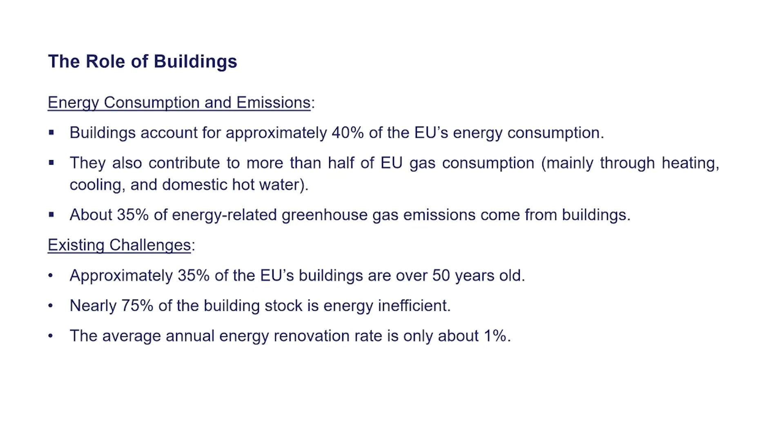First of all, as mentioned by Vitalija, buildings account for approximately 40% of the EU's energy consumption. They also contribute to more than half of the EU's gas consumption, and about 35% of energy-related greenhouse gas emissions come from buildings.

And there are actually a lot of existing challenges while trying to tackle these sustainability matters, as approximately 35% of the EU's buildings are over 50 years old, nearly 75% of the building stock is energy inefficient, and the average annual energy renovation rate is only about 1%.

The directive itself tries to tackle those existing challenges through two main ways: one is the renovation of currently existing buildings, and two is stricter requirements for new buildings.

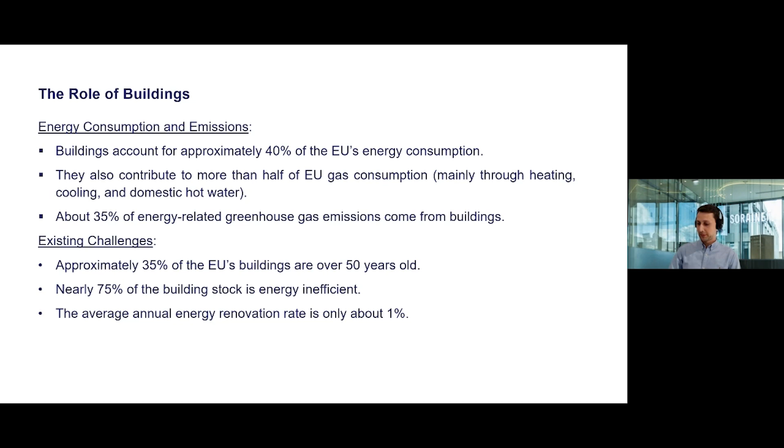So I would like to start from key requirements provided in the directive with regard to renovation of non-residential and residential buildings. Talking about non-residential buildings, it can be mentioned that the directive provides for two important thresholds: a 16% threshold and a 26% threshold. Each member state must set a maximum energy performance threshold such that 16% of its national non-residential building stock is above that threshold.

The key requirement here is that by 2030, all non-residential buildings must be below this threshold. The same rule is actually applied with regard to the 26% threshold. However, the requirement here is that by 2033, all non-residential buildings must be below this threshold.

So what does this mean in practice? Essentially, member states are required to, by 2030, renovate the 16% of worst performing non-residential buildings, and by 2033, renovate the 26% of worst performing non-residential buildings. So this is the key requirement with regard to renovation of non-residential buildings.

Moving to residential buildings, member states must ensure that the average primary energy use for the entire residential building stock decreases by at least 16% by 2030 compared to 2020, and by at least 20 to 22% by 2035 compared to 2020. This is also a huge requirement for member states, and the European Union is actually expecting that these requirements will cause a renovation wave.

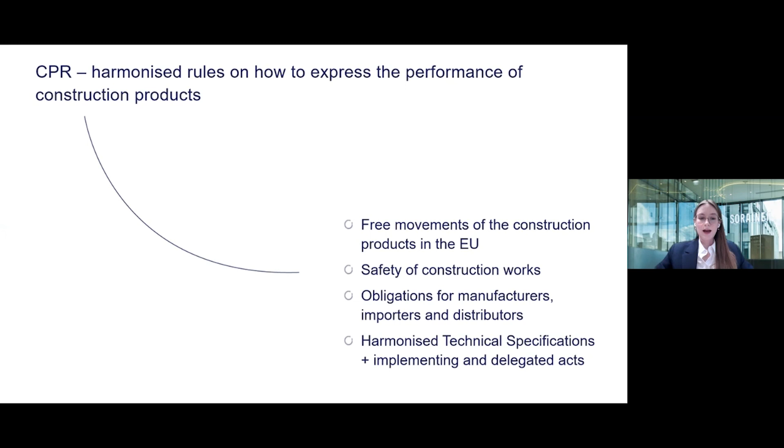So in 2016, when the Commission took up the research, they identified certain shortcomings in the implementation of the CPR and a number of challenges. Those were not all related to the environment as such. There have been a lot of constraints, starting from the standardization process not working and ending with surveillance problems.

But after 2016, we saw the European Green Deal communication, the Circular Economy Action Plan, and the Renovation Wave. All these highlighted the role of the CPR as part of efforts towards energy and resource efficient buildings and renovation, and in addressing the overall sustainability of construction products. So now we see CPR as an important pillar of sustainability in the sector.

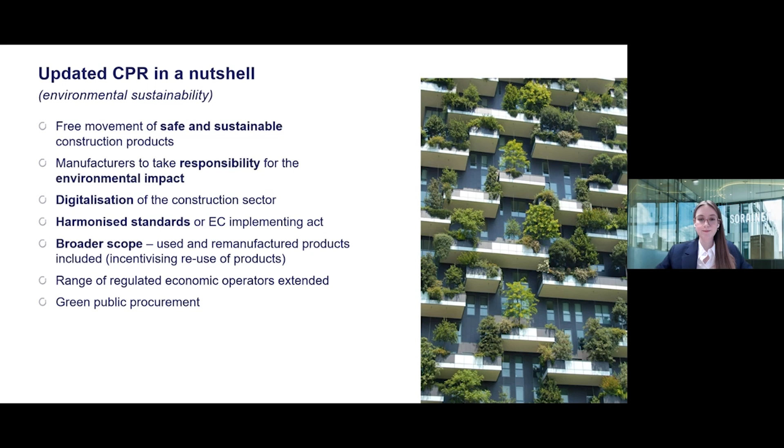Also, the range of regulated economic operators is extended, and there are some articles on green public procurement and construction products, as well as obligations of economic operators as such.

The declaration of performance that we talked about before will now become a declaration of performance and conformity, and it should include the environmental sustainability performance information over the life cycle of the construction product.

For the declaration, you need a basis, meaning the technical documentation - you have to assess your product and receive all the calculations of environmental essential characteristics. Those characteristics that you need to assess your product against are stipulated in Annex 2 of the regulation.

Overall, there is a responsibility to consider and address the sustainability aspects, and that means starting from design to production and then to marketing. Because, for example, the packaging of the construction product will also need to undergo assessment and be taken into account when presenting the environmental information.

We will see how it will go, and how many challenges we will face, because the declaration of performance and conformity and gathering all this information means we need new harmonized standards, and we will wait for them.

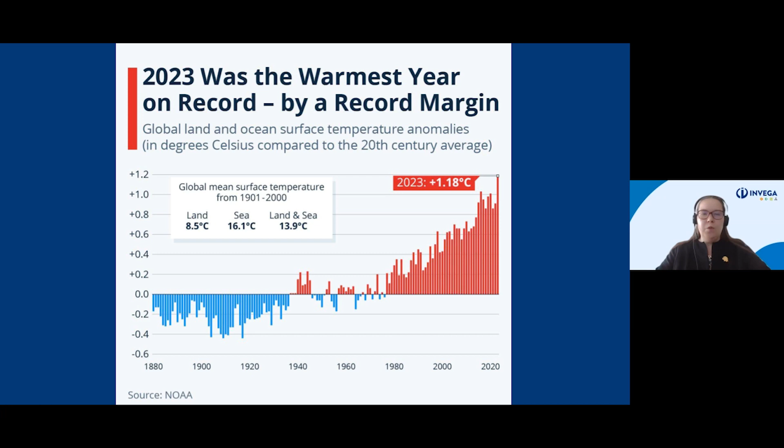This has been noticed quite some time ago by the policymakers, and people started raising questions of why is this happening. The culprit, one obvious culprit that was found, was carbon emissions.

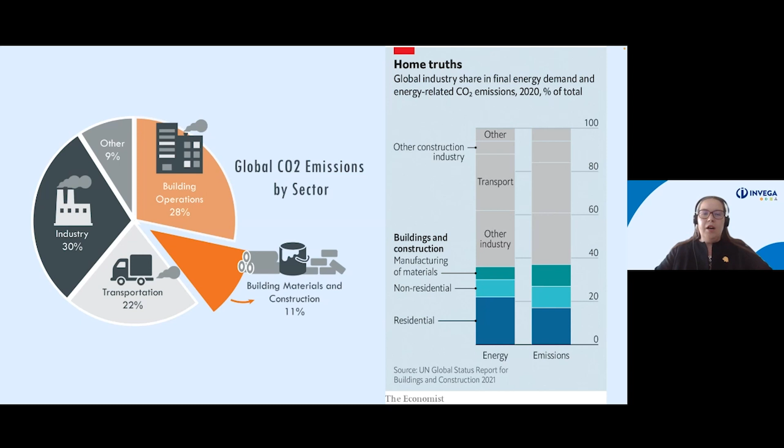When we start looking at where these emissions are coming from, construction and buildings form quite a big share of emissions. As has been mentioned before by Simonas, global carbon emissions from building operation and construction are about 40% of total. Similarly, about 40% of global energy usage comes from energy required to construct buildings and operate them.

When we start thinking about reducing this carbon footprint, we have to think about the life cycle of a building. We heard that concept before, when we heard about the regulation. So what is this life cycle of a building? It starts from the idea stage, when we start thinking of how we should design the building, and then when we actually design it, we have to think about every single step.

Raw materials - where are they coming from? How are they made? How are they going to be brought into the building site? How will the building itself be constructed? That's the stage before the building is even there.

Then when the building is done, we need to think about operational carbon. This is where the net zero concept, net zero buildings concept, talks about what it means to be nearly net zero operationally. Whenever we have a building, it has to be heated, cooled, and lit up with electricity.

All this energy has to come from somewhere, and if that energy comes from non-clean sources during the life of a building - normal buildings last 80, 100 years, easily, if it's a good, long-lasting building - that building every year will need energy to light up. And every year, if that energy is not clean, this process will emit carbon.

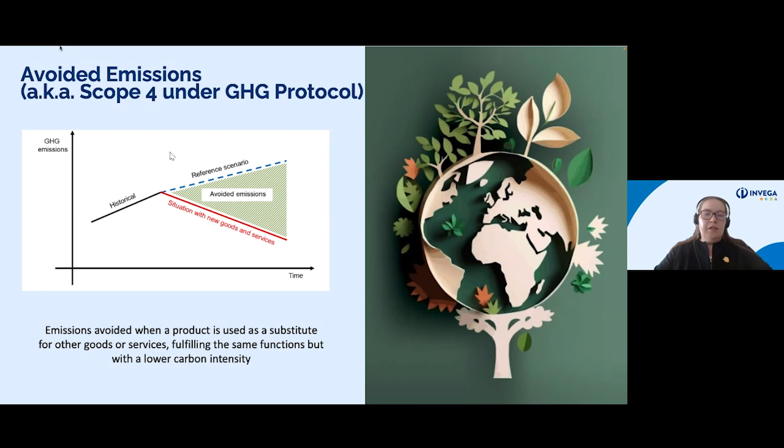The construction sector, given that it accounts for 40% of global carbon emissions through construction and building operation, is one of the big parts where if we start avoiding emissions, we can make a big dent in our overall global emissions and in our fight with climate change.

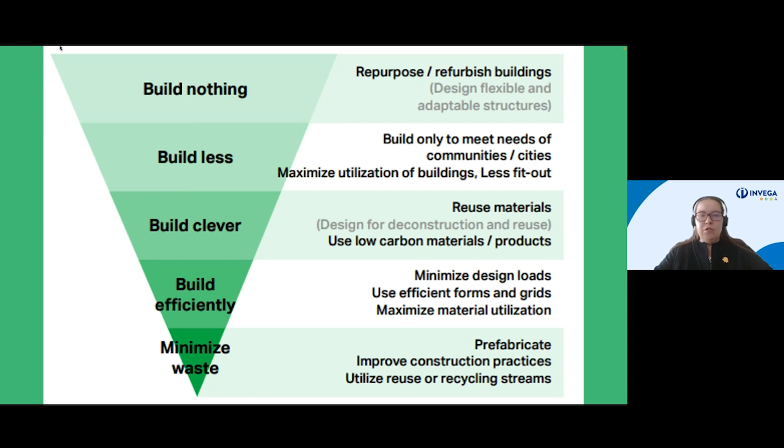Let's look at the materials and use low carbon materials, or materials that are easy to deconstruct and reuse. Let's build efficiently and let's minimize waste.

This is why we need to think about that, because in the previous version - not the recast that Simonas was presenting before - the commitment was already made to have a nearly carbon-free EU building stock by 2050. Now with this recast, the commitment to reducing the carbon of our buildings is even stronger. So 2050 is a long way away, but 2030, with all new buildings being basically net zero carbon, is coming very fast and is really near on us.

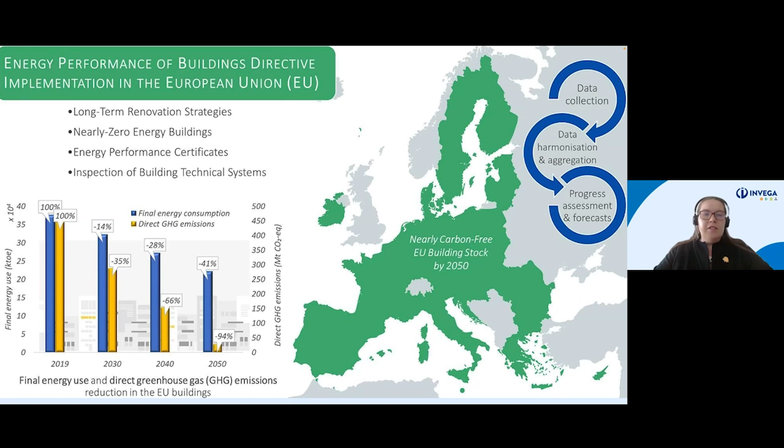And of course, all of this comes with funds. Even though the directive talks about new buildings, we know the wave of renovation is coming for old buildings because of this build less idea - do we really need to build a building instead of renovating it? The European Union is putting the money where the words are, and Invega is one of the institutions - the only institution in Lithuania in charge of managing the EU funds for renovation purposes.

We are the managing institution, though not for all renovation programs - we are the designing institution. Sometimes it's the Ministry of Environment, sometimes the Ministry of Economics and Innovation, but quite a lot of funds actually go through Invega to be distributed to different renovation projects.

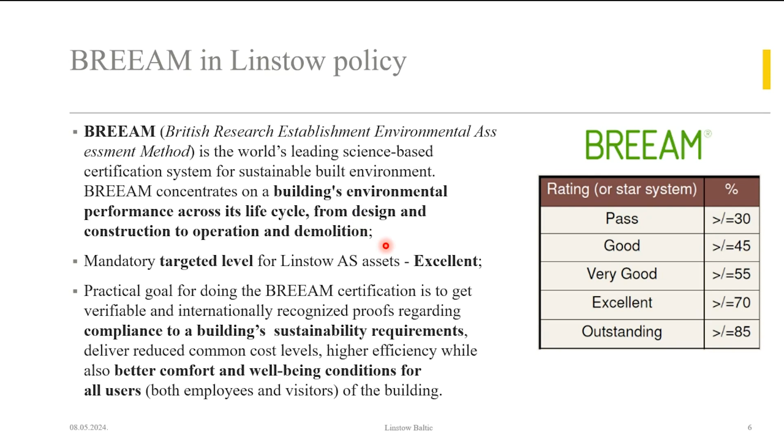Targeted level is excellent - here you can see the grades. Pass would be over 30% compliance, good is 45, very good is 55, which is actually very, very good indeed, but probably doesn't look fun as a number. Excellent is more than 70, and outstanding is more than 85. There are very few outstanding buildings in the Baltics - the first one actually was the SEB Bank building in Vilnius.

In Latvia, we still don't have one outstanding building, but we were the first ones who got the outstanding level for design stage. And then we are continuing also for the SEB Bank head office here in Riga, which is under construction currently. What are the practical goals?

The compliance of the building sustainability requirements, reduced common cost levels, so all the utility levels for our users, clients, and ourselves as well, high efficiency, and certainly better comfort and well-being conditions for all users - first of all employees, and then the visitors are coming.

About categories, it's interesting that there are 9 categories for BREEAM, plus an innovation category, which is not necessarily innovation as per its definition, but it's more like you do an extra mile to do something better, and then you get those credits as per the formulas defined in the BREEAM manuals.

But here we have to be pretty careful, since some of the categories and the percentages might vary even between Latvia and Estonia, Latvia and Lithuania. For example, in energy, knowing that in Latvia renewable energy is, I wouldn't say cheaper, but easier to get so far because of hydroelectric power stations, the percentage level is lower in Latvia than in Lithuania and Estonia. So you can concentrate on energy and get more valuable points in Estonia and Lithuania.

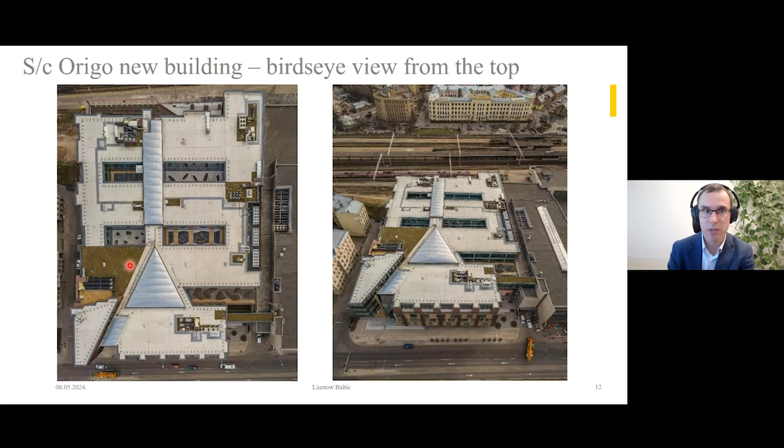Just some examples - like in this very central object, that's an early spring, that's why you don't see that much greenery, but there are green roof elements all over the project. You can see here the green terraces all over, within those terraces, also here.

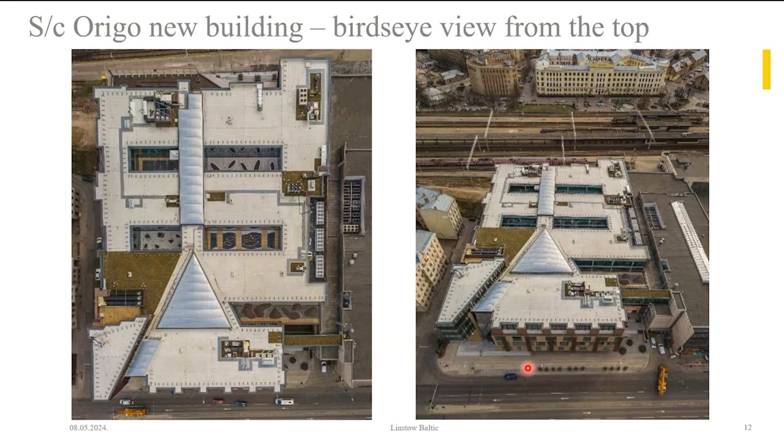There is rainwater management so that only part of the rainwater passes through and goes to the city systems and so on. Also from the landscaping perspective, a lot of improvements were done, but mostly you get the credits for different things regarding engineering networks and the envelope and so on. So more information is possible to find on the Origo webpage as such.

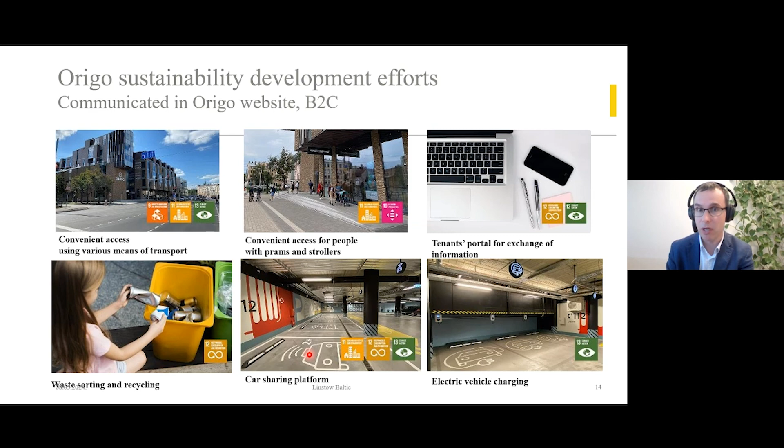Car sharing platform is one of the things which is like, does it really work? Yeah, there are technical challenges in that the GPS signal doesn't work in the basement so well yet, and this still needs to be fixed. But there are priority parking places meant for those who are coming to the office or to shop with 2 or more persons in the car, not only priority for handicapped people.

And then currently, this is last year's project. We also put in solar panels. The solar panels are a tricky thing.

For BREEAM, it only counts if you generate the renewable energy on the spot. So even if your company has a solar plant or a wind farm somewhere else, it doesn't count for BREEAM. It's just, okay, good, you get the green energy, but for BREEAM, you need to do it on the spot, and that will cost a lot.

It's like the maximum we could squeeze out from Origo and our other requirements, how to structure it from the historical heritage protection board and so on. But there is room to grow, though this is also a costly thing.

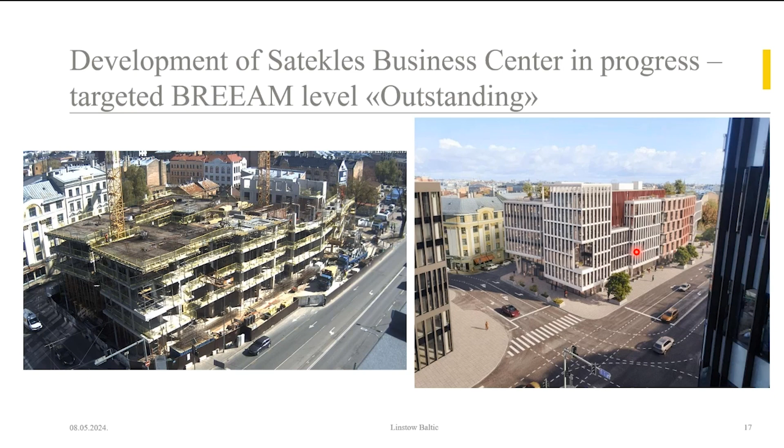And then for the Satekles Business Center, the upcoming head office for SEB Bank in Latvia, this is a picture of today, how far we've reached, and this is how it hopefully should look in June or July next year. There we are going for level Outstanding, and for design we already got level Outstanding with an enormously high number. I hope we will get the same or close to that after completion of the project.

So the additional qualities for BREEAM, I already mentioned some of those. It's certainly a more structured project management process, easier to track through everything. A more holistic approach, certainly for different things, and that's what we heard also in the previous presentation, how it should be organized.

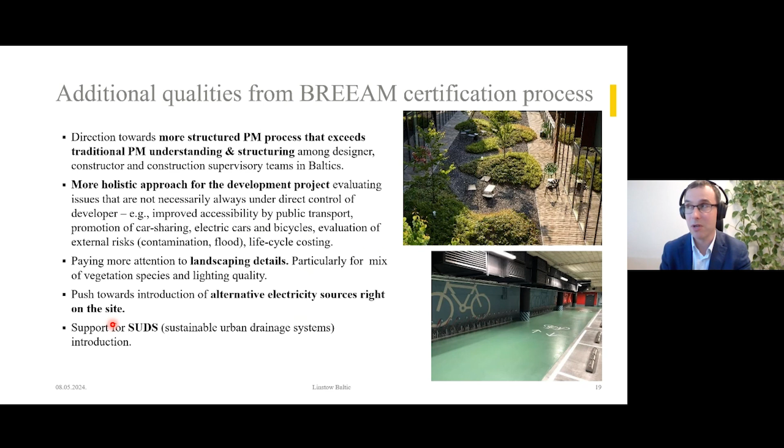And something a little bit funny in the Latvian language, you see this sustainable urban drainage systems. That's also where we pay a lot of attention, especially for zones where there are very high underground water levels. And the final slide, this is just to give information about the cost part.

But I would say for a new construction scheme, minimum price for a new building would be around 200,000, just because of a lot of additional studies you need to do and additional work to make the proofs by the architects as well. On top of this also comes something for the general contractor, which is not so easy to count, but this is a direct addition to the developer.

And then BREEAM in use is like 10 to 20,000, depending on the size and scope, certainly what you are certifying. But then you need to do recertification. I would say from experience that the value of the new construction certificate is higher than for BREEAM in use, but still BREEAM in use you can do when it's already done.

But a good thing in Riga - I don't know about Vilnius - but in Riga, finally, from this year, it's possible to get a real estate tax reduction for the building for a 10-year duration if the threshold is 55% or higher. So it means like BREEAM Very Good or LEED Silver, LEED Gold, about those levels - you get the tax discount. So there is also an additional incentive from the city side.